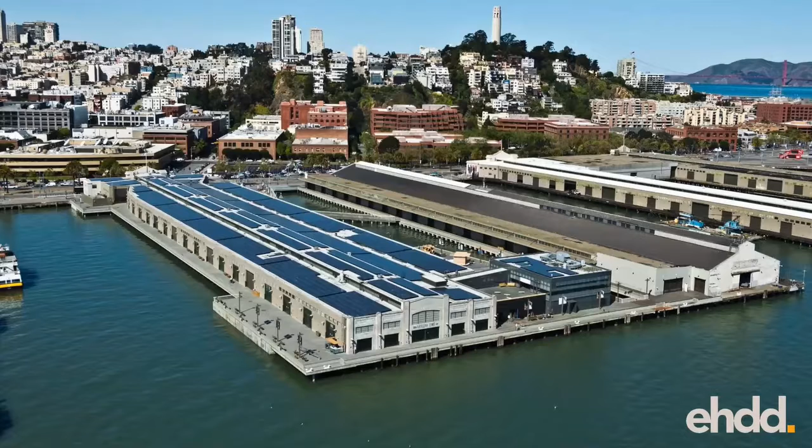These were projects with clients that had a vision, that wanted to push the envelope a little bit. They were willing to spend a little bit more to do that. And that was a wonderful thing. I have to say, though, in the last few years, it seems like it's gotten pretty easy. And I'm serious about that.

Title 24 has raised the floor a lot. A lot of the things we used to brag about doing are now in the code. The solar power purchase agreements are now cheaper than what most of our clients are paying for their utility. So if you have space for solar, any building can be a zero energy building cheaper than a non-zero energy building. If the power purchase agreement is really cheaper, it's astonishing.

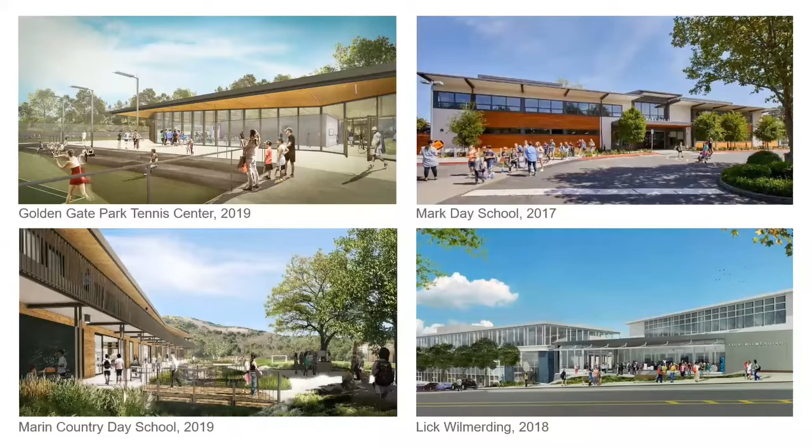This 100,000 square foot spec office building for a developer in Boulder, PVs on the wall displaced the cladding, so it actually had the same performance per dollar because we didn't have to pay for that cladding. We currently have 4 schools, either recently completed or in construction, that are all electric, zero energy, done within the conventional school budget. It just does not seem that hard anymore.

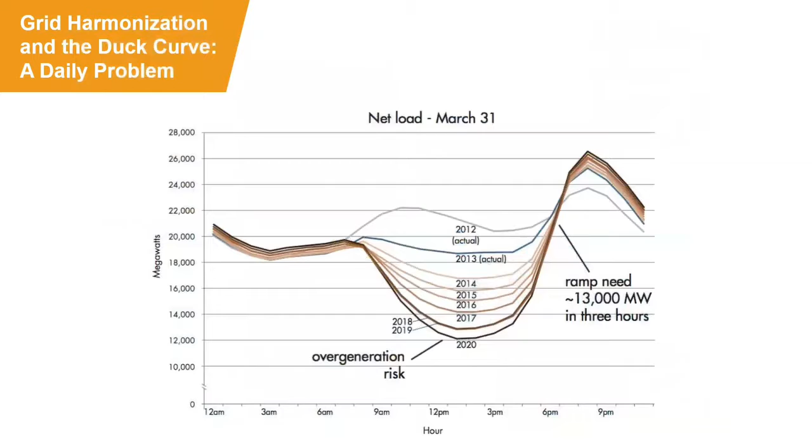So we all know about this duck curve, and as Mozzie just pointed out, people often think about it as a grid harmonization thing, but I look at it and I think about low carbon green energy, and I see that belly of that duck is really clean, low carbon energy. And so I want to design my building to use energy during that time and not during the other times. So what's the opposite of a duck? It's a camel. So I want to design a camel building to solve duck curves.

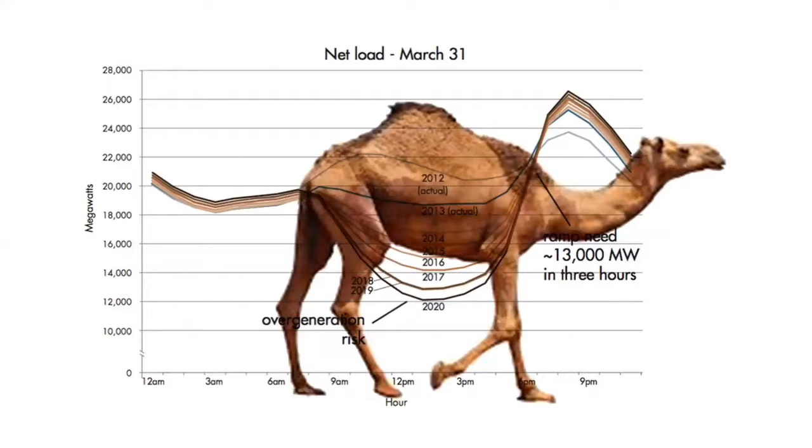Next slide. So this is a graph of the Packard Foundation's net energy use over 5 different years. You can see that curve is going up in July, so we're exporting to the grid, and then it starts going back down during the winter, down, down, and then it starts going back up. So that duck curve is a daily thing. This is a seasonal thing. We're exporting and importing from the grid at different times at different levels of carbon emissions.

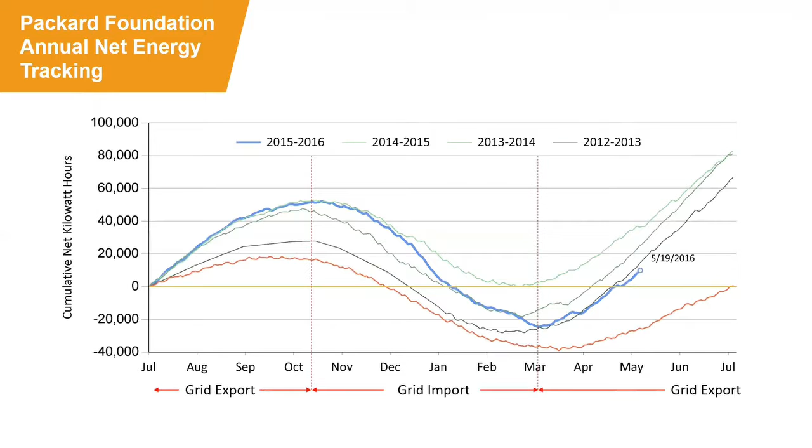And so we always knew we were doing that, but it was too hard to figure out what to do about it then. Well, now is the time to figure that out. So that's what we're starting to work on. I'm doing a project down at UC San Diego, and they have this decarbonization initiative, which somebody spoke about earlier today. I was poking around their website, and this guy, Steve Brick, had this amazing presentation. I didn't hear it, but I looked at his presentation. The link's on there, so you guys can check it out. And this gets at, I think, Jim's question earlier.

We can do storage on a daily basis, but it's this seasonal basis that's the really wicked hard problem, is what his case is. And how do we solve that? How can we as design professionals solve that?

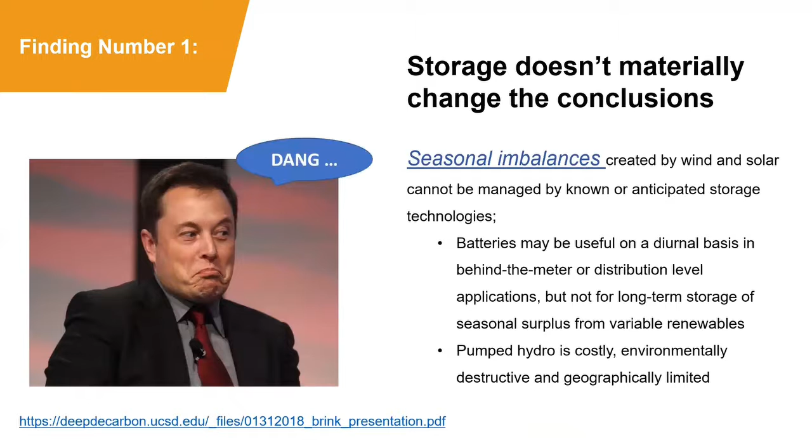And so when I saw Martha present this, it just knocked my socks off. I couldn't think of an animal that was this shape, so I don't have one of those. Fish, maybe. And so how do we design our buildings to use more energy in the green squares and less energy during the red times? And what are those energy uses?

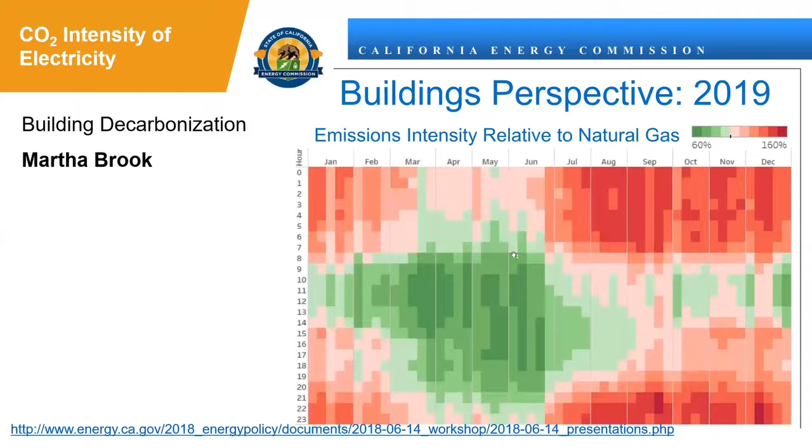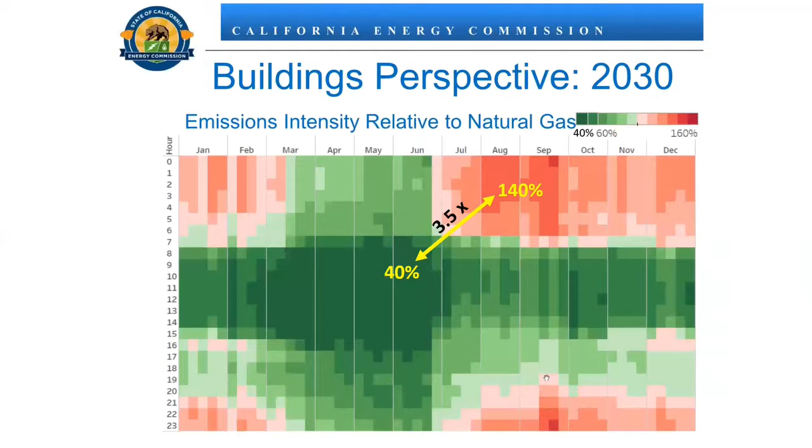And wow, I'm racking my brain trying to save another 5% better than Title 24. And here I can save 350% better if I shift the time of my building. Time of year. Time of year, exactly right.

So California, LBNL did this great report that I saw presented, 2025 California Demand Response. And they put these different demand response desires on this time scale. So seconds on the right, in the middle it's more this daily thing, which I think a lot of people think about when they think about demand response. But it's that left-hand one, shape, that I think is really interesting.

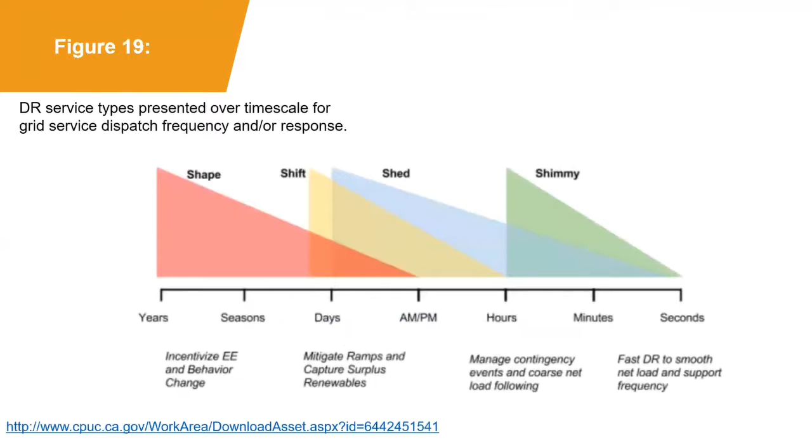And my hypothesis in this presentation is that that's where architecture and enclosure can really make a contribution. That daily thing may be more about batteries and heat pumps and smart appliances and all that other stuff that doesn't really control on an annual basis. So what do we do on the architecture and enclosure?

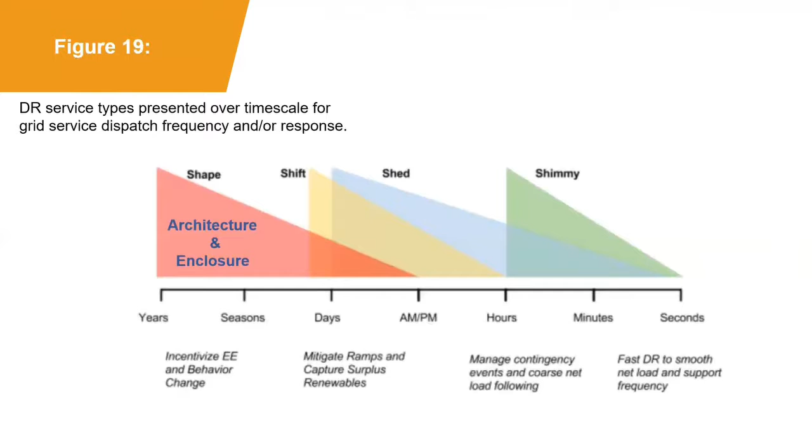Some years ago, I did a lab at Stanford for Chris Field, a great climate scientist and a real person who educated me a lot. And we converted a 100-year-old cabin into a passive house for him. He was in a redwood forest. He had no solar access.

I went and had lunch with him recently, and he said this building is so stable. It just rides for days without changing temperature. And we know that the peak loads in the winter are really low. They also said it was super quiet, and not even an ant could get into that house. It was so tight. And so my theory is that the passive house strategies are a good fit for reducing our energy use when it's the dirtiest.

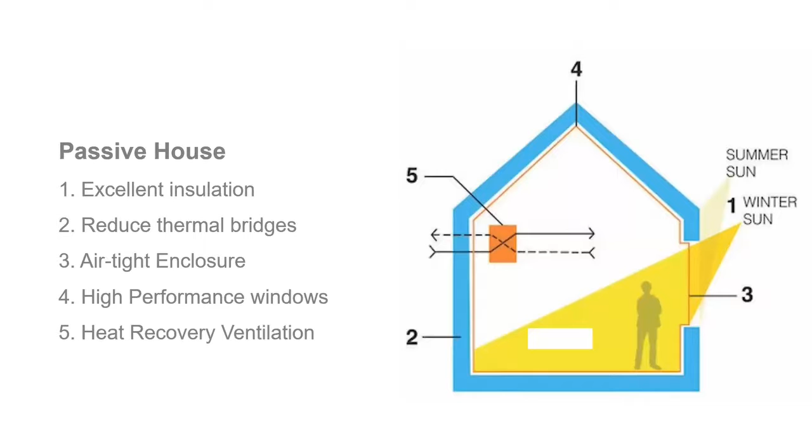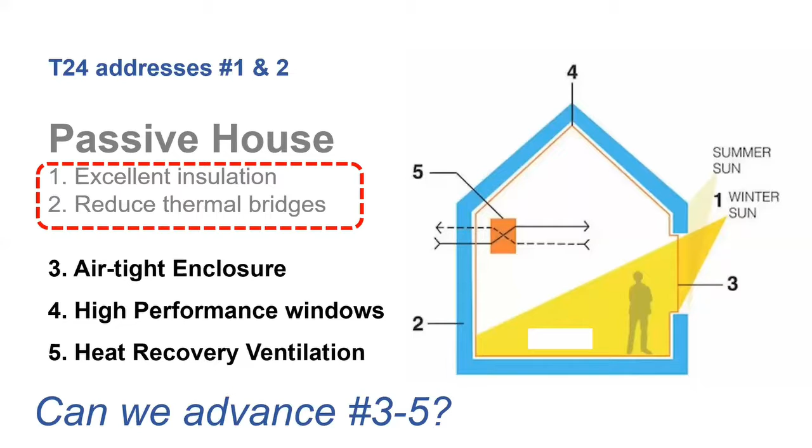And should our energy model or our emissions model give us 3.5 times credit or double credit or whatever it is for those dirty hours? And you all know these strategies: excellent insulation, reduced thermal bridges, airtight enclosure, high performance windows, heat recovery ventilation. So Title 24 has done a great job, in my view, on the insulation levels, and with the exterior insulation on reducing thermal bridging a lot. So can we make progress on these items 3 through 5?

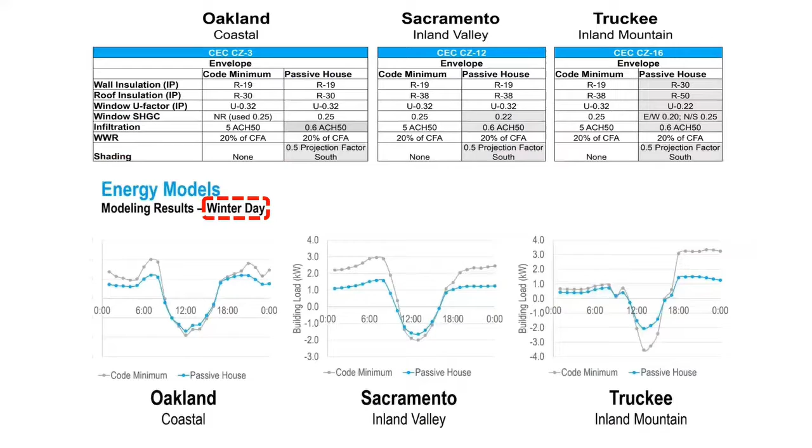What is a 0.5 projection factor? Oh, that's shading. Yeah, that's solar shading.

Okay, so what do we do with all that stuff as architects? I'm thinking about this as an architect. What do we do? So we have this school right now. It's under construction, at Country Day School. I've been working out there for 20 years, and we were detailing this when I had this idea.

And so we went back and looked at some of our old schools out there on campus. This is the last one we did 4 or 5 years ago. And we got one of these nifty infrared cameras. It was only $499. Every architect should have one.

And I could look at the detail, and you see we had this concrete curb at the bottom of the building that we really liked. It rooted the building in the site. It was durable. But you look at it through the infrared camera, and you see that thermal bridging just losing heat.

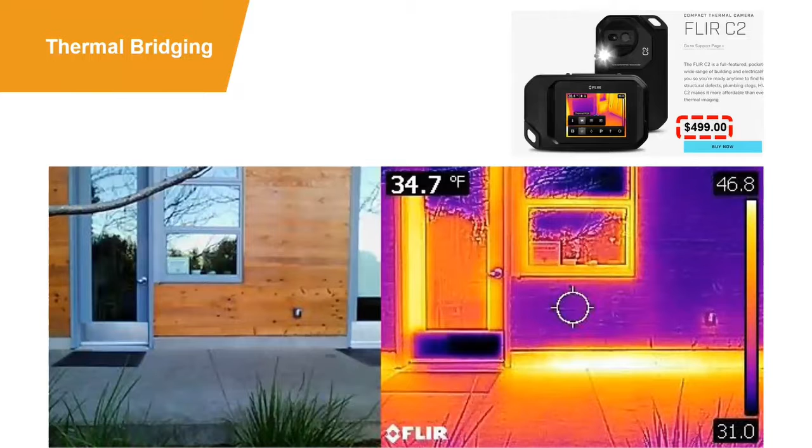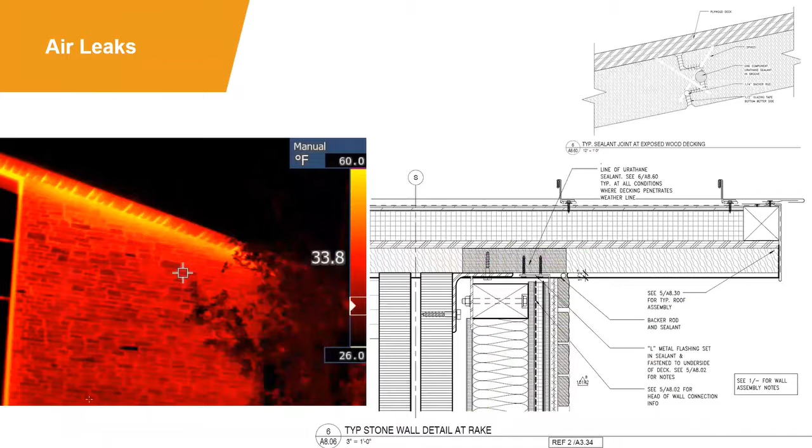So that, you know, you can't unsee that. So we changed our detail. We went back and looked at the Packard Foundation, and we had these wood plank ceilings that extended out past the roof edge, and you see air leaks coming out there and taking the heat with it. And we had an air sealing detail, but it was too hard to build. It didn't work.

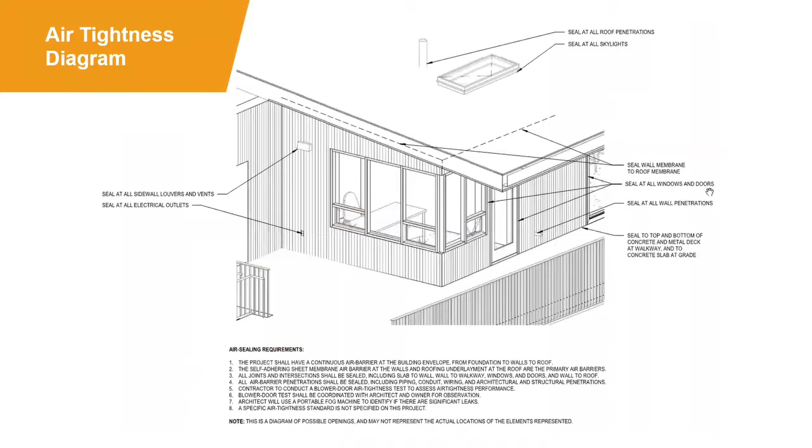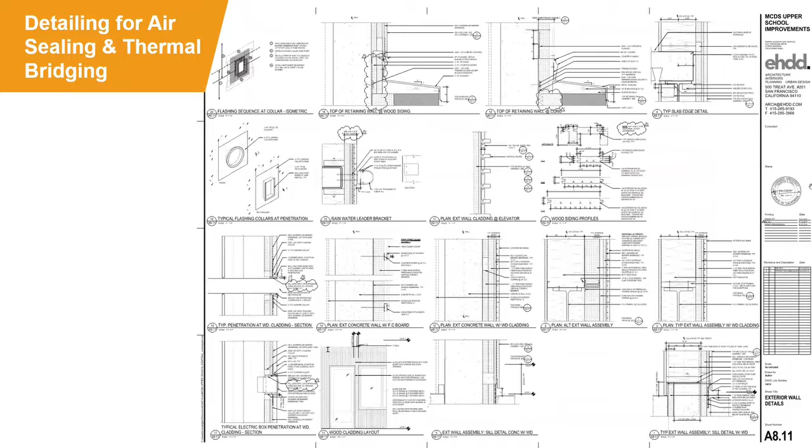So on this new building, we sort of said, okay, we're gonna call for some air sealing. We're gonna detail all the thermal bridging. We did a little axon. We explained what we're trying to do to the contractor in simple language. I know you can't see all these details, but we looked at all our details for thermal bridging and air sealing. We generated a bunch of standard details that our other teams can steal for their projects.

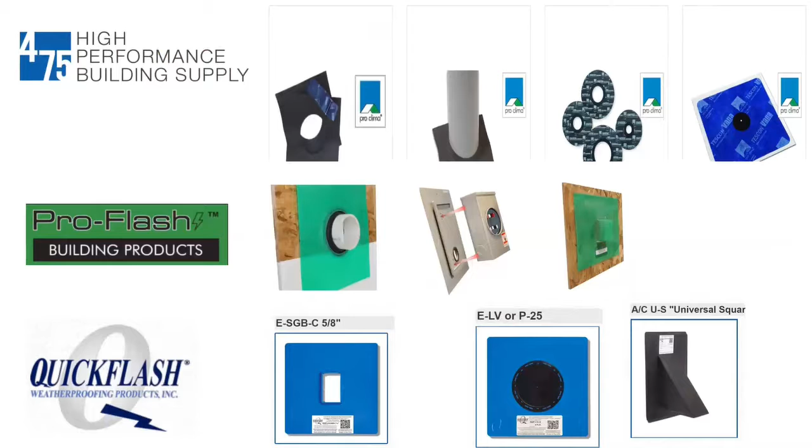I went to the Pacific Coast Builders Fair a couple weeks ago. Air sealing products all over the place. You know, they weren't there 7 or 8 years ago, but they're there now. There's great resources. Seattle's doing amazing work. Army Corps of Engineers doing amazing work. We can do that air sealing. It's not that hard.

So those were the ones we weren't getting to, right? We got the insulation, we got the thermal bridging, but the air sealing, the heat recovery ventilator, the energy recovery ventilator. This one snuck up on me. I didn't see this coming. We did a Zehnder heat recovery in that passive house 7 years ago, but now I've got several projects, and unbeknownst to me, they had energy recovery ventilators in. I was just talking to Stet Sanborn and Shannon Allison at Integral, and they're reducing the ventilation load by about 2/3.

And so these are Stet's comments. We can get a 65% reduction in the ventilation heating load. We can downsize, therefore, our heat pumps and make them less expensive. He's used them on all of his projects in the last 3 years, and he says they're going to be mandatory in 1 to 2 code cycles. In case you guys didn't know.

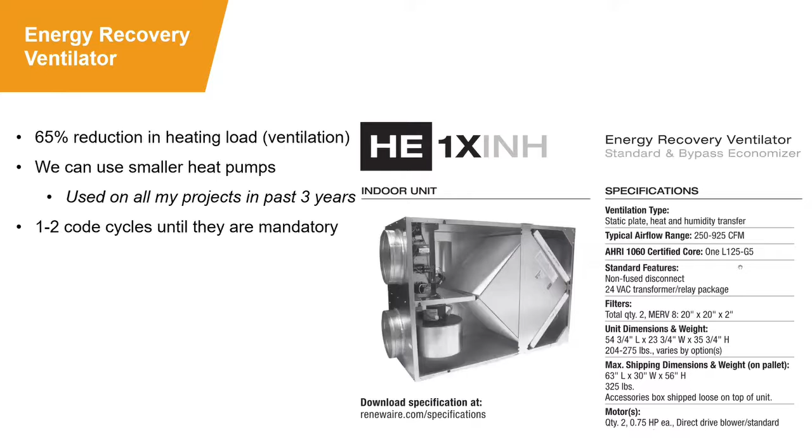That's it. The one we haven't made much progress in, we did triple glazing on Packard and on that passive house retrofit. There was a premium for those things, so we haven't gotten that on most of our projects. But we've been learning from Lawrence Berkeley Labs, Steve Selkowitz, and Robert Hart. And they're working on this drop-in thin triple replacement. It's the same thickness as a standard insulated glass unit, so that Andersen or any other manufacturer can drop that in as a glass option and get double the performance of that window.

It means you just swap it out. You just say, instead of your standard glass of this, or this, add this one. So it's the same thickness. It doesn't add a lot of weight, so they don't have to redesign their frames. No, or retrofit. Anybody that replaces their windows. Yeah, it's just the IGU. It's a standard IGU that fits any of their window frames. Steve wants me to talk to.

So this concept that he's talking about, we're forming a collaborative. We call it the California High Efficiency Window Collaborative. And it involves the Energy Commission, Lawrence Berkeley Labs, the CBIA builders, PG&E and SCE. And the goal of the collaborative is basically to identify and remove the barriers for high efficiency windows, and to effect market transformation from the standard windows with a U factor of 0.30 to high efficiency windows, which we define with a U factor of 0.20. So that's something we've undertaken, and stay tuned.

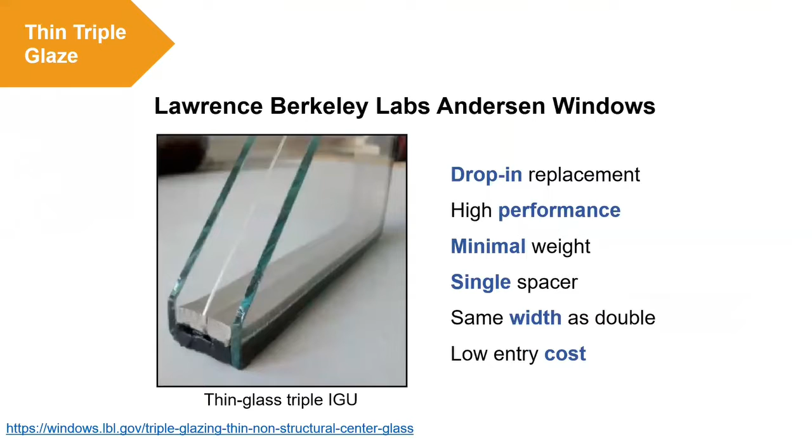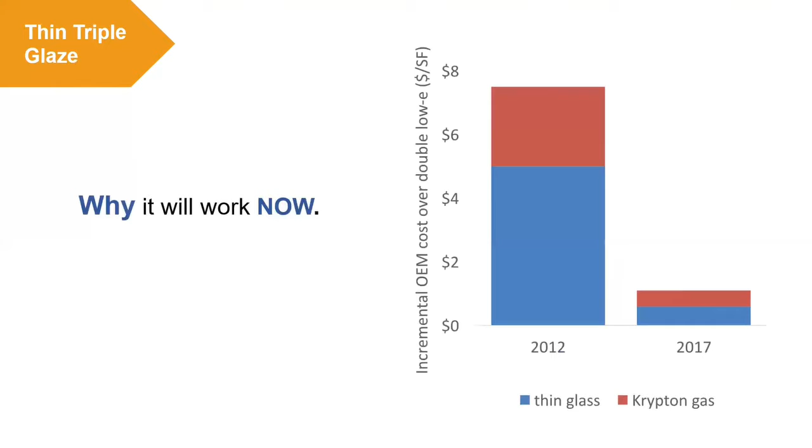Bar charts. This is really interesting to me. The reason it's affordable now is the prices of krypton have collapsed because their primary market was halogen bulbs, and the prices of thin glass have dropped because everybody's making large flat screen LED screens now. So it's a commodity product. So they're estimating the payback in 6 years. But for us, there is a radiator all along that exterior wall that was very expensive, with lots of piping and enclosure. So I think it would more than pay for itself in many perimeter applications up front.

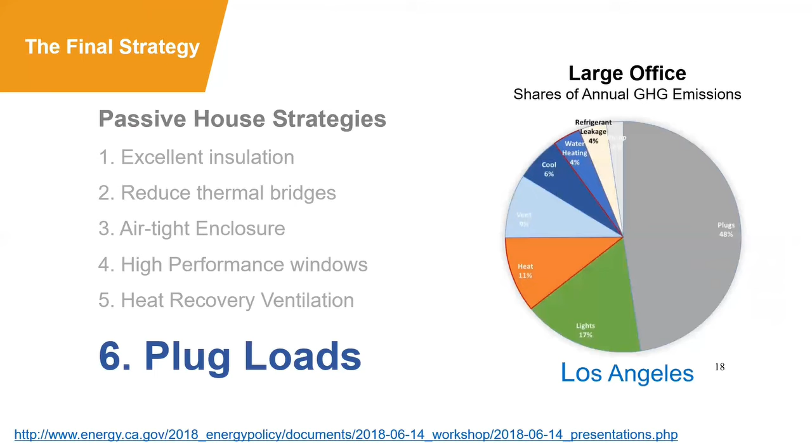And so with that, I have one more slide. So those were the 5 passive house strategies. Move to the pie chart. Plug loads. These plug loads have just taken over, and we're over here working on all these little tiny slices of the pizza. We've got to find a way to tackle those. So we need to add that to those passive house strategies in order to address those dirty, high carbon hours of the power grid on an annual basis. And so with that, I will stop.